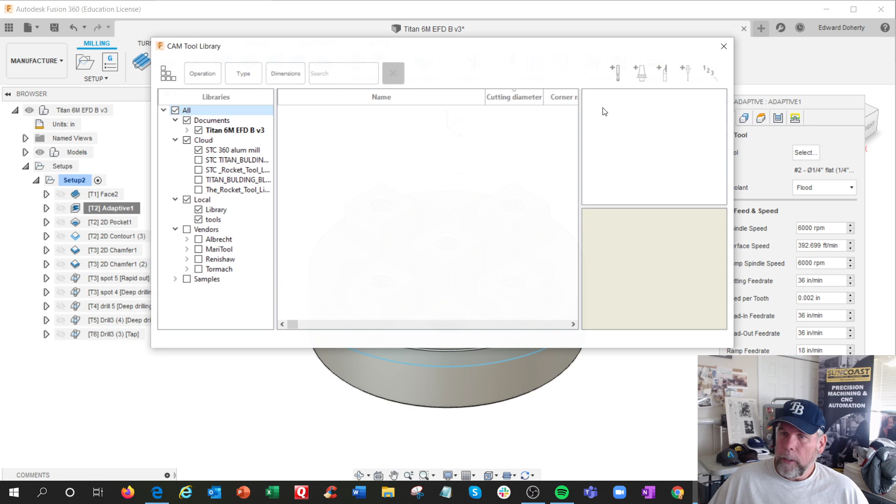Edit, right? Feeds and speeds. I actually made my own tool library. So I have my Titan building block and my STC Titan building block. And this would be the active one. So let me shut this one off and local tools off. Okay, we got two being shown right now. Two setups actually. Two setups are active. But I'm pulling all my tools out of this area.

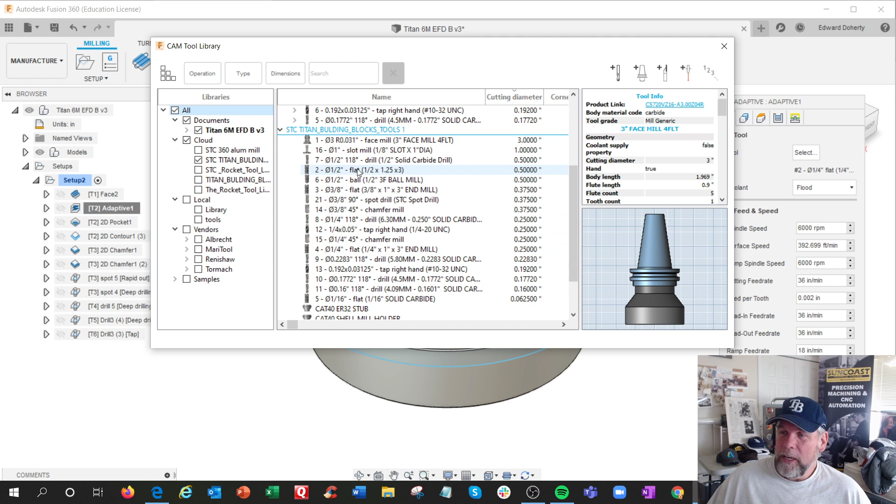So what I did, I'm doing it to save time first of all. So if I'm in the 1/2-inch flat end mill, the one we use the most, the 3-fluter, in feeds and speeds, I've already upped my game here because I said the TM1 can run 6,000 RPM. Now, where do I get all these numbers, right?

Let's go into this. This is a real basic feed and speed chart for carbide end mills, right? Right up here it says aluminum alloys, which is what we're cutting. And you get all these different materials. You're not going to have all the materials on there, but this is a pretty good indication. All right, SFM, surface feet per minute.

I'll have to link the Haas Tips video on this, which is an excellent video on what I call the big trailer tire and the little trailer tire. You're going down 75, and you're towing your boat trailer, and next to you is the big tractor trailer. You're both doing 60 miles an hour. Well, we know they're probably doing 80, but which tire is rotating faster, which is RPM, right?

Your little boat tire. So the little tools got to spin faster than the big tools to keep up. And in reverse, you can't be spinning the big tools too fast. They'll burn up, rubber will be flying off. All right, so this is a recommended surface feet. It says right there, recommendations for their tools, which is pretty much all carbide end mills. 600 to 1200 surface feet per minute.

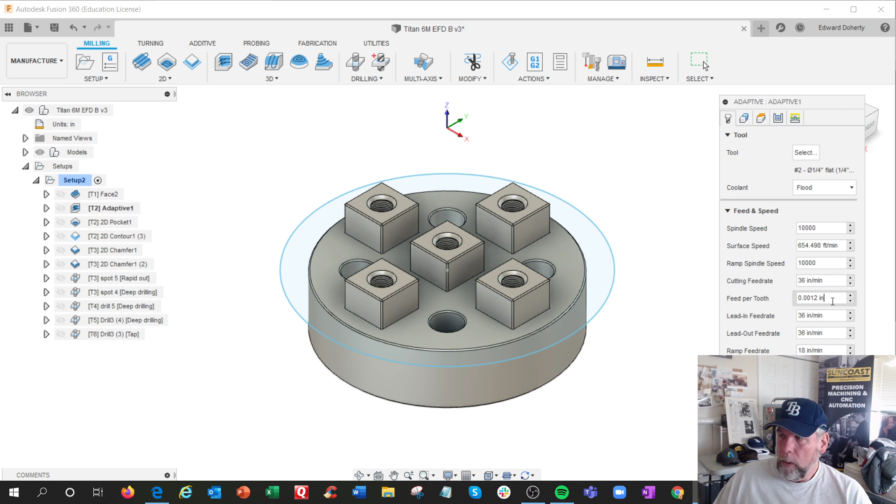All right, down here is feed per tooth. I forget what it said before, but it says 1,000ths and 2/10, and that chart said 2 to 4. So if I even just go on the conservative side, let's just go conservative, right? I actually am kind of conservative. 650 is on the low end of the SFM scale. That gets me 36 inches a minute, right? And this should be just fine. It's not like going crazy.

And you have some basic parameters. These are all basic parameters. And they're all how long is the tool, how much is it sticking out, how rigid is your setup. So if you talk about standard in the vise parts in there, pretty good. You don't have a tool that's like this long. These will work all day long. There's some other notes down here. I didn't discover these notes until I actually started reading them.

TIN, increase speeds by 10 to 25%. You wouldn't use TIN on aluminum. A lot of those end mills are uncoated. But you can use TIALN or TICN. I've run TICN. Notice up in here, you can increase the speeds like 25 to 50%. So you can actually do some more stuff here. And it says for lighter radial. Radial's like a radial tire, like sideways, radial.

Lighter radial depth of cuts, which in trochoidal, that's what it's doing. It's doing very light sideways cuts. Higher range of surface speeds should be used. So for greater radial depth of cuts, which means you're taking bigger chunks sideways, lower range. Slotting should be reduced. Slotting is considered to be the toughest thing for an end mill to do, because you're plowing right through like a boat through the water. The whole front of the end mill's just chugging away.

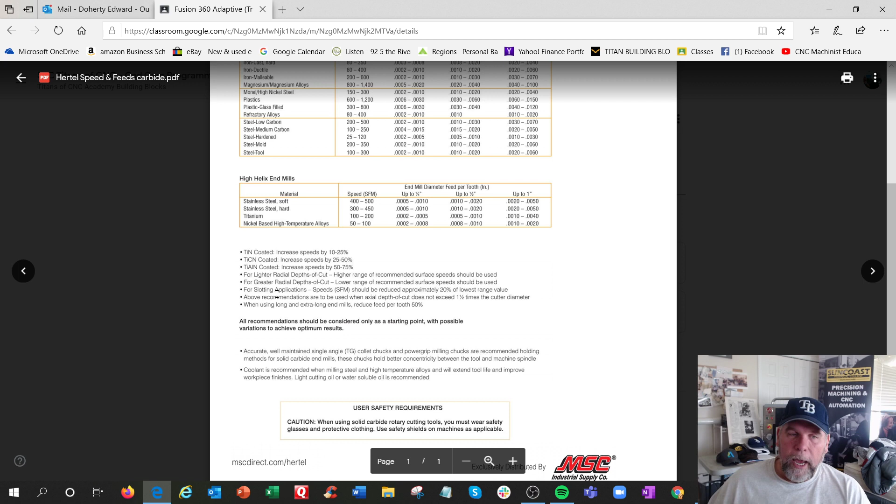And if you're running a high-speed end mill, they'll actually deflect and bend a little bit in the non-cutting direction. So it's almost impossible to cut a slot dead on with just an end mill going forward. It'll probably be a little tapered, and the finish might not look the best. So slotting is kind of going away because of this trochoidal tool path, which can only be...

You have 15 minutes left of computer time. Getting kicked off the computer again.

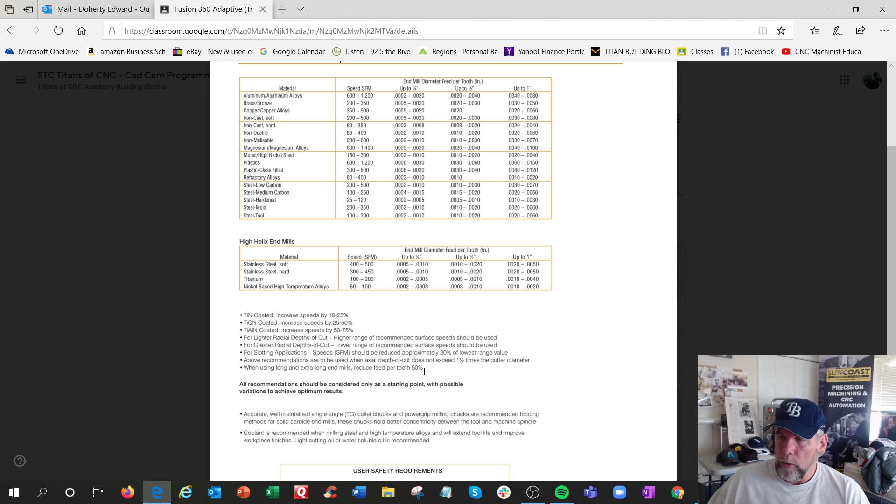Okay. By this new modern adaptive trochoidal dynamic milling strategies. All right. And here's it. When using extra long end mills, reduce feed per tooth by 50%. Remember, these are recommendations. So if I was cutting something new, like we was cutting titanium, I plugged in some numbers. There was some right here.

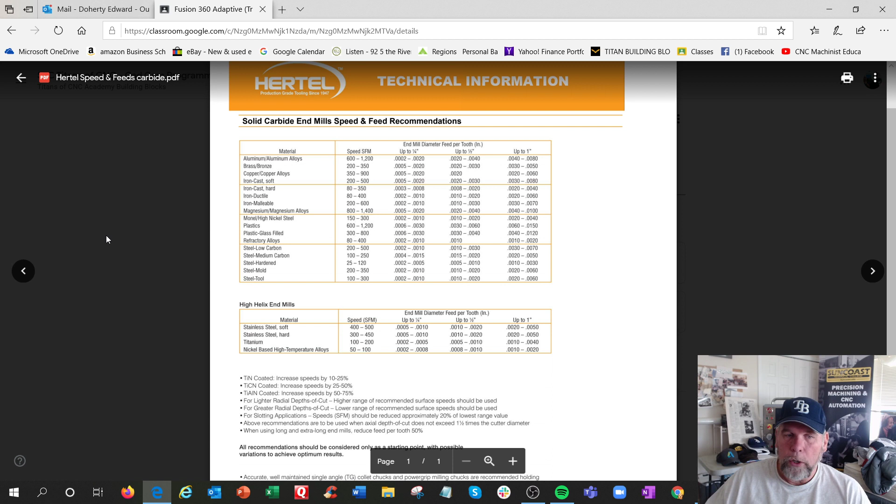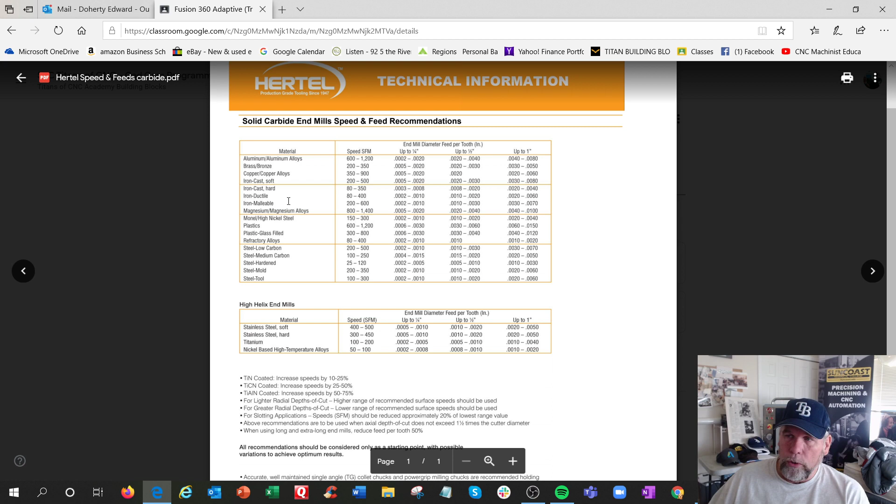At the machine, I say, I think my RPM is okay. I am unsure about my feed rate. So I reduce the feed rate by 50% at the machine, because I'm not sure. It's all new. I might be doing tool steel, a new stainless. And I'm going to listen to it, watch it, watch the load meter on the machine. Oh, it seems to be cutting just fine. 80%, 100%. Yeah, it looks good. You're learning as you're going along. We're always just learning. So this should be your go-to basic chart when you plug these things in.

And what I meant by the saving time is, if you have all these tools already laid out with the RPMs already, then it saves you a lot of time filling in this space over here, especially in this one. So now your feed rate also can affect surface finish if you're going really blazing along. So the surface finish stuff you may want to do a little bit more conservative than the roughing stuff, you know. And a lot of that just comes from experience, if you stay in those ranges there.

Now in here is a discussion on tool path strategies with the adaptive.

I have a playlist here of various dynamic milling. Dynamic milling is becoming a very hot area, trochoidal style milling. So I have a couple discussions on there, one on CAM settings for your Haas machine, NYC CNC 2D adaptive, one on end mills, Niagara end mills.

Avoiding chatter is a good one from Haas. How to change the max feed rate on your Haas, because a lot of them don't come out of the factory with the blazing speed that they're capable of, so you can change them. I think on the next gen control, you need to buy the parameter thing. So this was testing Helical. Helical is a company, I actually pronounced it wrong.

These are the end mills we were using to cut the titanium with, and this is the HS series. I started realizing that this really applies more to steel cutting than aluminum. Aluminum you can get away with anything. The helix on the end mill, it was a variable helix, and I started seeing that word over and over again. Every end mill company seemed to have a variable helix end mill.

That's for this trochoidal style milling. This is 4 flute, 5 flutes. These right there, variable index, 7 flute.

So, and in this one... You have 10 minutes left of computer time. Okay, I'll be done in a minute.

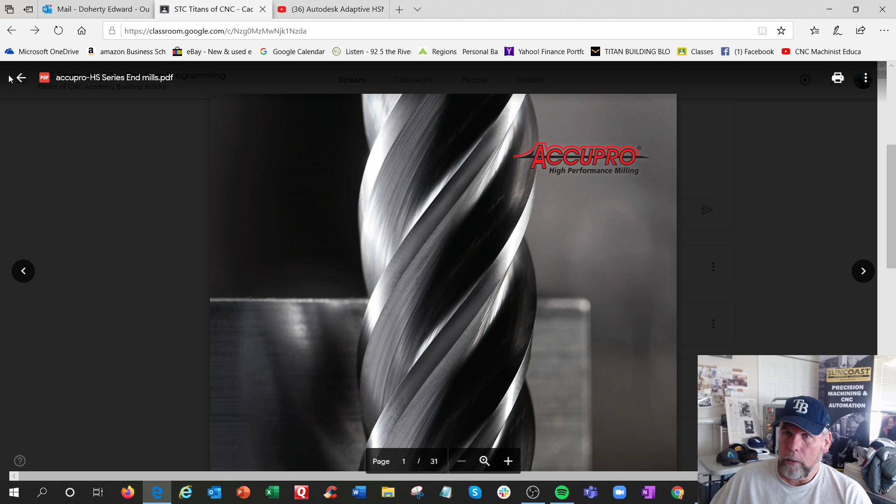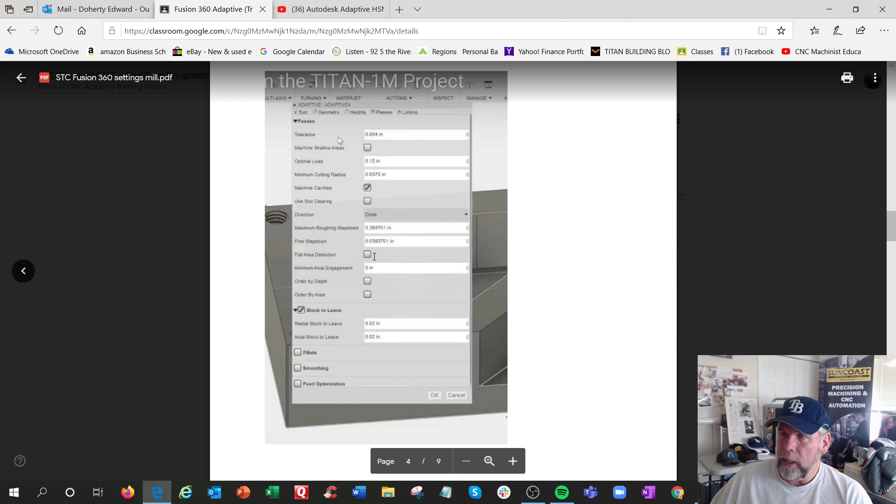Had some feeds and speeds in here, so. Let me go back. And the last one was settings that I'm using in class. Discussion on heights, settings in adaptive. I took some screenshots. Heights, model top. Passes. This is from the Titan 1M, stock to leave, and some of the settings, because honestly I was forgetting them too.

Passes. Optimal load is the radial engagement, this number right up here. I haven't quite figured out the minimum cutting radius, but they give you a little picture if you put it over there. Machine cavities being checked on, and this one here is maximum roughing step down.

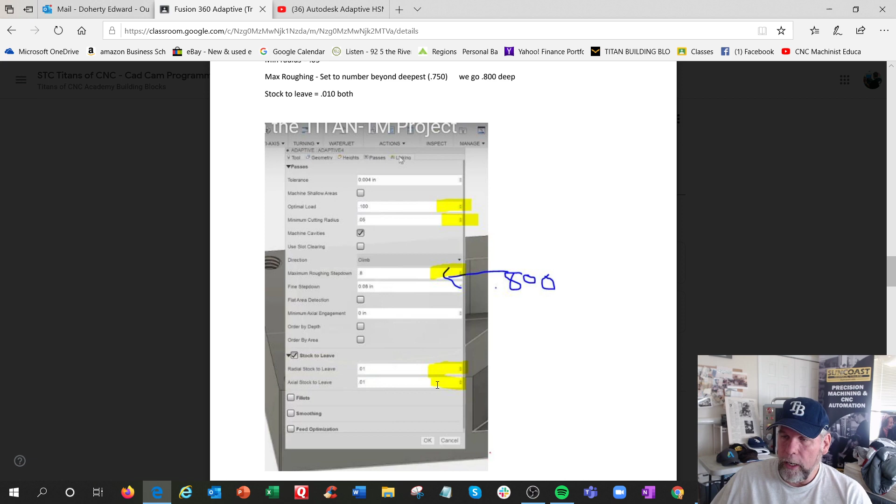Now, the trochoidal style, the advantage is, we used to use pocket and go down in steps, like cut and go down, go down, go down, because you couldn't go full depth, it would buzz like crazy. So now you can go full depth because you can go sideways in small steps. So to get it to go full depth, you got to play with this number here. This number just needs to be bigger than the deepest part. And then your stock to leave numbers. You got to leave stock with adaptive.

And linking parameters. I was reading some other people that were using 50% stay down. There's a lot of discussion on that, meaning stay down versus coming up and rapiding around. Okay. Lift height. Titan uses 0 and 100. Lift height is what they call a micro lift. You cut in one direction and then you got to retract because you're always climbing, like cut, reposition, cut, reposition. So it goes and cuts, and then it's got to go back and reposition.

If you leave it on 0, it's actually like dragging on the floor again. So if I pick it up just a smidge, 10 thousandths, and go back to where it was, and then I increase the feed rate to 400 inches a minute because that's as fast as the TM1 will go, which actually picks up some time in the non-cutting areas. When I first saw this style, it used to freak me out because I was watching this and hoping this doesn't crash, but got comfortable with it.

And this is helical entry, and then you got settings like ramp diameter and minimum ramp diameter. So sometimes I've had to squeeze the helix small because it wouldn't do it. You picked it, but it still showed a straight line.

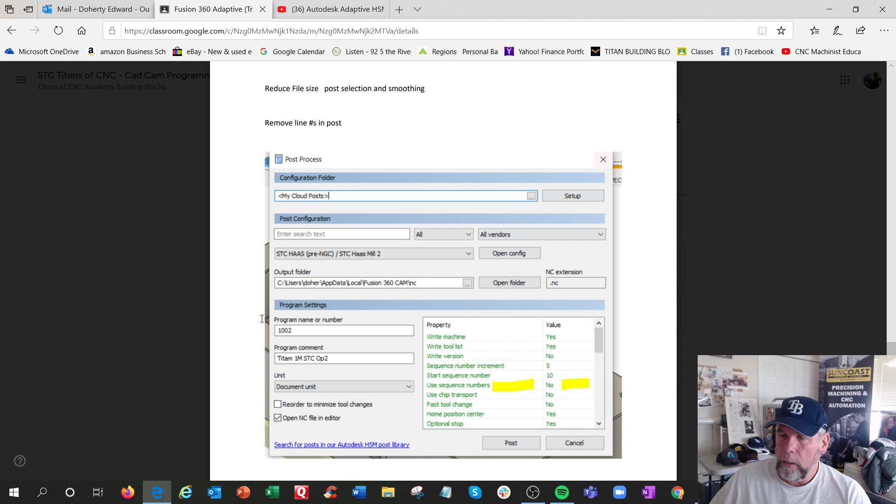And especially if you don't have the expanded memory, you're probably going to be running off the USB in the FNC mode. And I prefer to run the program in the memory. All right, so we try to shrink up the program. That's an easy one. Remove the sequence numbers. They're not needed. Okay. Another thing to do is smoothing.

See adaptive up here? By changing this tolerance, it says right here, it's smoothing, aka the arc filter. To make a curve, it's going to create a crap load of G1s; to go from like here to here might be 100 lines, when it might be like 2 arcs. So you're saying if the arc can be made within 2 thousandths, make it a G2 or a G3. By doing that, you're shrinking the code up.

So we experimented with that. You have 5 minutes left of computer time.

Already. All right. We cut program size 25 to 50% just by doing that. And I had a list of videos here, but they're on the playlist. So that's pretty much my talk on this area.

So if you already have a tool library, then when you're putting them in, less work in this area. But believe me, on the fly, you're going to be changing these numbers because you're going to be thinking about your strategy and going, oh, I don't know if that little teeny end mill can really do that. Let me plug all these numbers in.

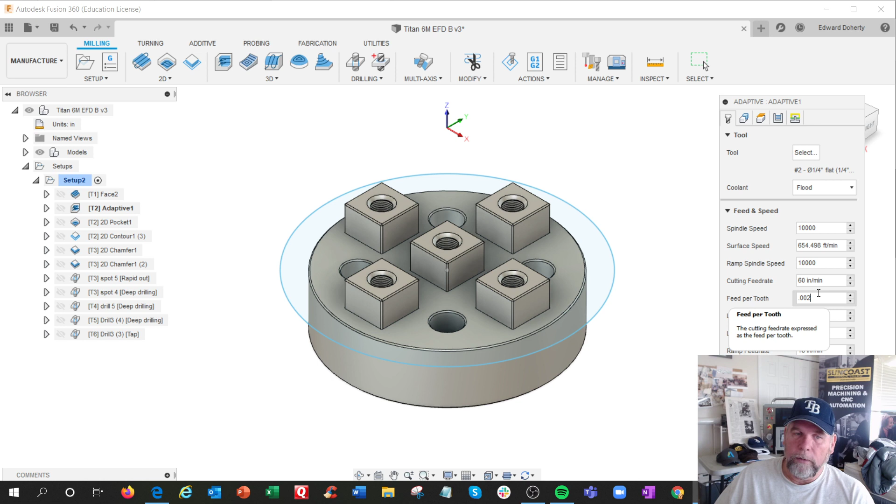Now, when you're in Fusion, when you change this number, it only changes cutting feed rate. It does not change lead in and lead out. It's a very small area, probably not worth your time, but if you want to play with that. But if you're wondering why this affects that number, it's also relative to the RPM. So you want to have the RPM first.

So if you base everything on SFM, you'll know where you're at. But you really need to know your machine's capability. Then you have plunging feed rate. Now, if you're actually literally plunging in, which ramp milling would be plunging, I had a rule of thumb that I would use the cutting feed rate divided by 2. Just as a starting point.

And that's pretty much all you need to know on the feeds and speeds stuff. And you want to get knowledgeable about this so you can start plugging these in, see if they work. And if you get on the job and you're actually doing this kind of stuff, even at the machine, I'll do some temporary feed and speed tweaking, turning the knob or the button.

I looked at the chart and they're running this thing like 2,000 RPM. I think it could go 7,000 RPM. I'm not gonna twist the knob right up, so I'm just gonna go another 20%. That sounds fine. So I can make improvements on the floor and edit the program at the floor, which is why you need to know G code.

And when I was on the floor, I'd write the notes and we'd return the program to the programming room, and they would review it and say yea or nay, and then you can butt heads later.